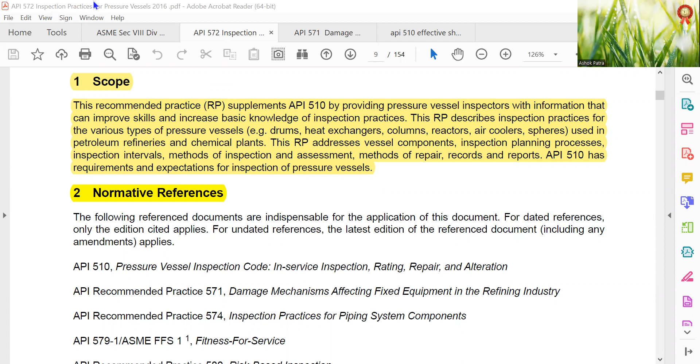API 572, inspection practices for pressure vessel.

This recommended practice, RP, supplements API 510 by providing pressure vessel inspectors with information that can improve skills and increase basic knowledge of inspection practice.

This RP describes inspection practice for the various types of pressure vessels: drums, heat exchangers, columns, reactors, air coolers, spheres used in petroleum refineries and chemical plants.

The RP addresses vessel components, inspection planning process, inspection intervals, method of inspection, assessment, method of repair, records and reports. API 510 has requirements and expectations for inspection of pressure vessels.

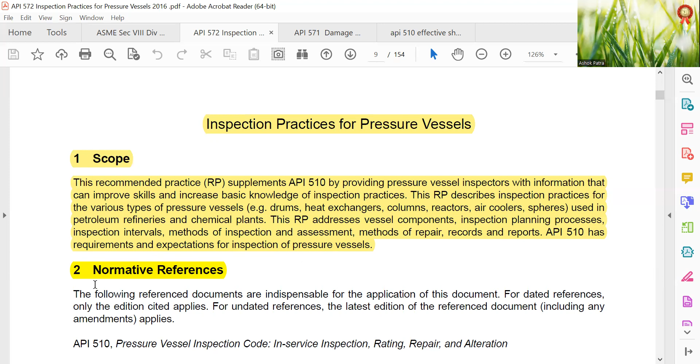Normative references: 510, 571, 574, 579-1 ASME FFS-1 fitness for service, 580 risk-based inspection, API publication 2217A, guideline for safe work in inert confined spaces in the petroleum and petrochemical industry.

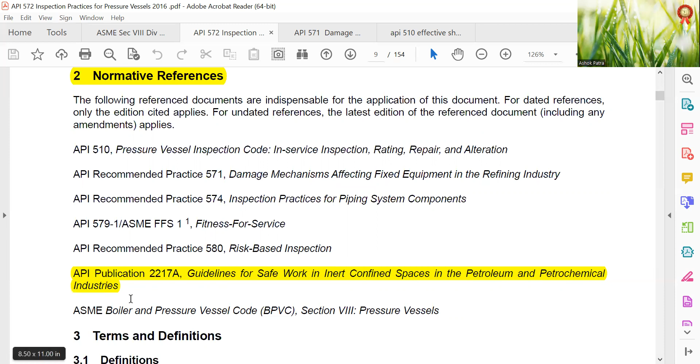Alteration: a physical change in any component that has design implications that affect the pressure containing capability of the pressure vessel beyond the scope described in existing data reports.

The following should not be considered alteration: any comparable or duplicate replacement, the addition of any reinforcement nozzle less than or equal to size of existing reinforced nozzles, and the addition of nozzles not requiring reinforcement.

Cladding: a metal integrally bonded onto another metal under high pressure and temperature, whose properties are better suited to resist damage from the process than the substrate material.

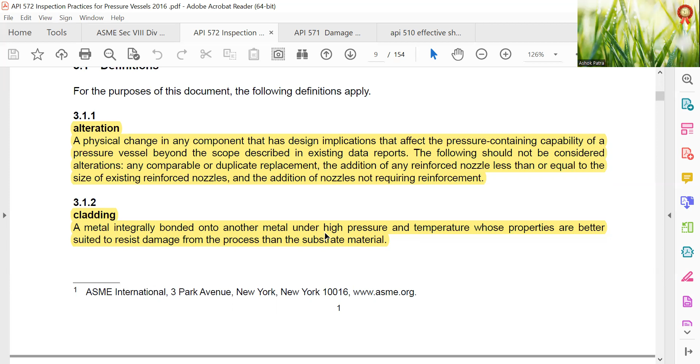CMLs: designated areas of pressure vessels where periodic examinations are conducted in order to directly assess the condition of the vessel. CMLs may contain one or more examination points and utilize multiple inspection techniques that are based on the predicted damage mechanisms to give the highest probability of detection.

CMLs can be a single small area on a pressure vessel, a 2-inch diameter spot, or a plane through a section of a nozzle. The recording points exist in all 4 quadrants of the plane. CMLs now include but are not limited to what were previously called TMLs.

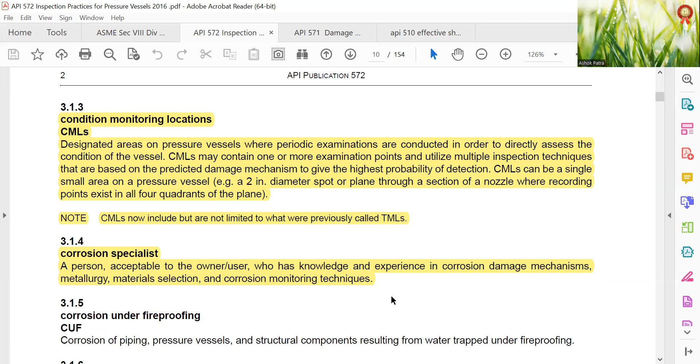Corrosion specialist: a person acceptable to the owner user who has knowledge and experience in corrosion damage mechanisms, metallurgy, material selection, and corrosion monitoring techniques.

CUI: corrosion under insulation. External corrosion of carbon steel piping, pressure vessels, and structural components resulting from water trapped under insulation. External chloride stress corrosion cracking of austenitic and duplex stainless steel under insulation is also classified as CUI damage.

Damage mechanism: any type of damage encountered in the refining and chemical process industry that can result in flaws, defects that can affect the integrity of vessels—corrosion, cracking, erosion, dents, and other mechanical, physical, or chemical impacts. See API RP 571 for a comprehensive list and description of damage mechanisms.

Damage mode: the physical manifestation of damage—wall thinning, pitting, cracking, or rupture.

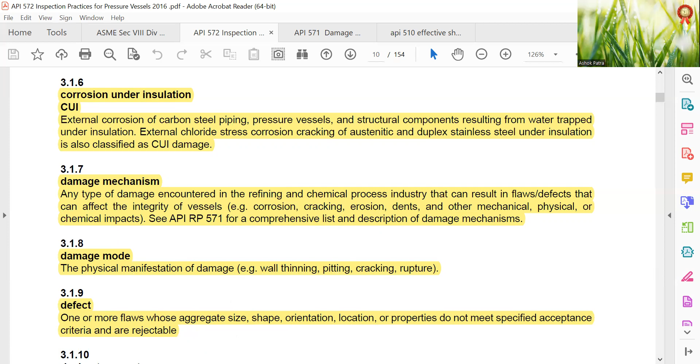Defect: one or more flaws whose aggregate size, shape, orientation, location, or properties do not meet specified acceptance criteria and are rejectable.

Examination point, recording point, measuring point, test point. Test point is a term no longer in use as test refers to mechanical physical test, tensile test, pressure test.

An area within a CML defined as a circle having a diameter not greater than 3 inch, 75 mm. For a pressure vessel, CMLs may contain multiple examination points. For example, a vessel nozzle may have a CML with multiple examination points, an examination point in each of the 4 quadrants of the CML on the nozzle.

External inspection: visual inspection performed from the outside of the pressure vessel to find conditions that could impact the vessel's ability to maintain pressure integrity, or conditions that compromise the integrity of the supporting structures—ladders, platforms, support. The external inspection may be done either while the vessel is operating or while the vessel is out of service, and can be conducted as an on-stream inspection.

Flaw: imperfection or other discontinuity noted during inspections that may or may not exceed the applicable acceptance criteria.

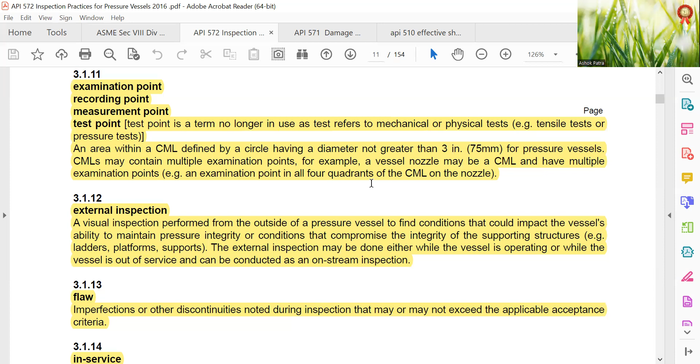In service: designated pressure vessel that has been placed in operation, as opposed to a new construction prior to being placed in service or a retired vessel. A pressure vessel not in operation because of process outage is still considered an in-service pressure vessel. This doesn't include pressure vessels that are still under construction or in transport to site prior to being placed in service, or pressure vessels that have been retired from service.

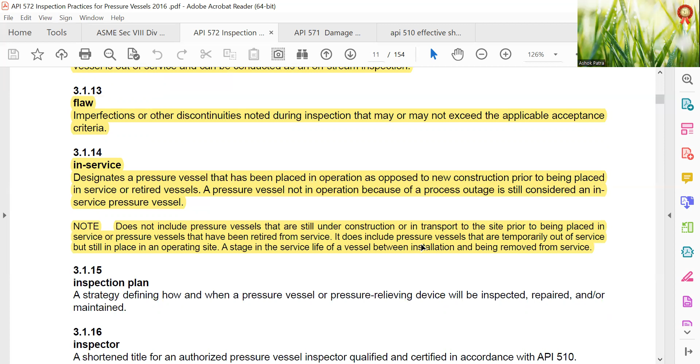This doesn't include pressure vessels that are temporarily out of service but still in place at an operating site. Service life is the life of a vessel between the installation and being removed from service.

Lining: a non-metallic or metallic material installed on the interior of a vessel whose properties are better suited to resist damage from the process than the substrate material.

Maximum allowable working pressure, MAWP: the maximum gauge pressure permitted at the top of the pressure vessel in the operating position for a designated temperature. Pressure is based on calculations using a minimum or average pitted thickness for a critical vessel element, exclusive of thickness designated for corrosion, and adjusted for applicable static head pressure and non-pressure loads—wind, earthquake, etc. The MAWP may refer to either the original design or a rerated MAWP.

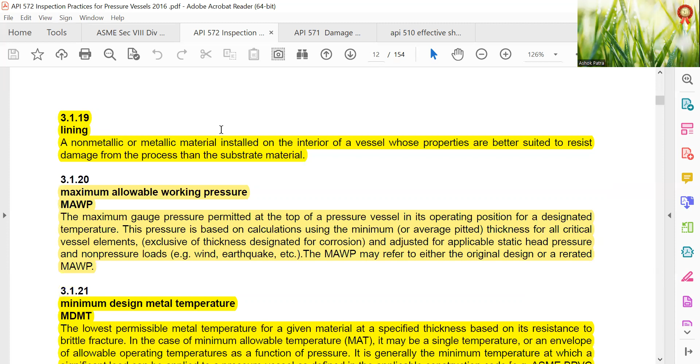The lowest permissible metal temperature for a given material at a specific thickness based on the resistance to brittle fracture. In the case of minimum allowable temperature, MAT, it may be a single temperature or an envelope of allowable operating temperature as a function of pressure. It is generally the minimum temperature at which significant load can be applied to a pressure vessel as defined in the applicable construction code.

ASME BPVC Section 8 Division 1, Paragraph UG-20B, might also be obtained through FFS evaluation on-stream condition, whereby the pressure vessel has not been prepared for internal inspection.

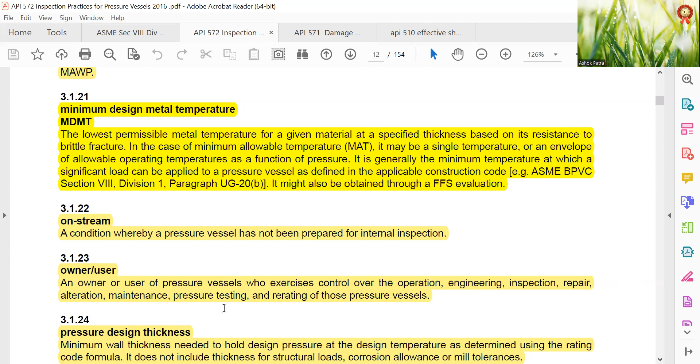Owner user: an owner user is the pressure vessel entity who exercises control over the operation, engineering, inspection, repair, alteration, maintenance, pressure testing, and re-rating of those pressure vessels.

Pressure design thickness: the minimum wall thickness needed to hold design pressure at design temperature, as determined using the rating code formula. This doesn't include thickness for structural loads, corrosion allowance, or mill tolerance.

Pressure vessel: a container designed to withstand internal or external pressure. The pressure may be imposed by an external source, by the application of heat from a direct or indirect source, or by any combination thereof. These definitions include heat exchangers, air coolers, column towers, unfired steam generators, boilers, and other vapor generating vessels that use heat from the operation of a processing system or other indirect heat source.

Pressure vessel engineer: a person acceptable to the owner-user who is knowledgeable and experienced in the engineering discipline associated with evaluating mechanical and material characteristics that affect the integrity and reliability of pressure vessels. The pressure vessel engineer, by consulting with appropriate specialists, should be regarded as a composite of all entities necessary to properly address the technical requirements. Whenever the term engineer is used in this RP, it refers to a pressure vessel engineer.

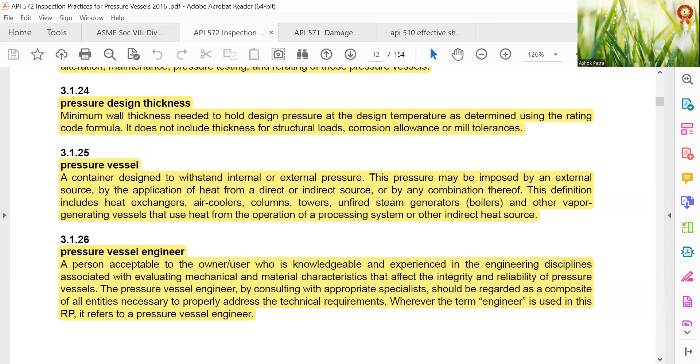Repair: the work necessary to restore a vessel to a condition suitable for safe operation at the design condition. If any of the restorative work results in a change to design temperature, MDMT, or MAWP, the work shall be considered an alteration, and the requirement for re-rating shall be satisfied. Any welding, cutting, or grinding operation on a pressure containing component not specifically considered an alteration is considered a repair.

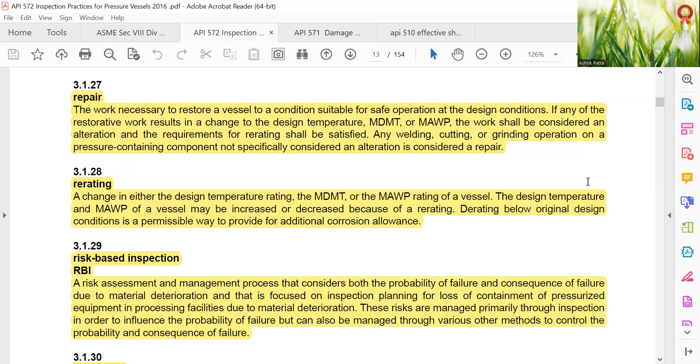Re-rating: a change in either the design temperature rating, MDMT, or MAWP rating of a vessel. The design temperature and MAWP of a vessel may be increased or decreased because of re-rating. De-rating below the original design condition is a permissible way to provide additional corrosion allowance.

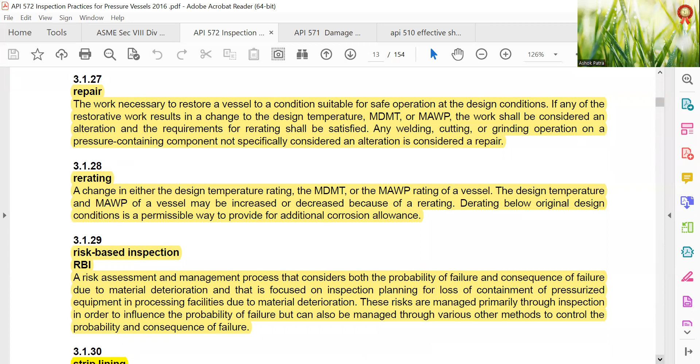Risk-based inspection, RBI: a risk assessment and management process that considers both probability of failure and consequences of failure due to material deterioration, and that is focused on inspection planning for loss of containment of pressurized equipment in processing facilities due to material deterioration. The risks are managed primarily through inspection in order to influence the probability of failure, but can also be managed through various other methods to control the probability and consequences of failure.

Strip lining: strips of metal plates or sheets that are welded to the inside of the vessel wall for the purpose of protecting the vessel construction material from interaction with process fluids. Normally, the strips are of more corrosion resistant or erosion resistant alloy than the vessel wall, and provide additional corrosion and erosion resistance. This is similar to plate lining, except narrower strips are used instead of larger plates.

Temper embrittlement: the reduction of toughness due to metallurgical changes that can occur in some low alloy steels, such as 2.25 chrome 1 moly, as a result of long-term exposure in the temperature range of about 650 to 1100 degrees Fahrenheit, that is 345 to 595 degrees centigrade.

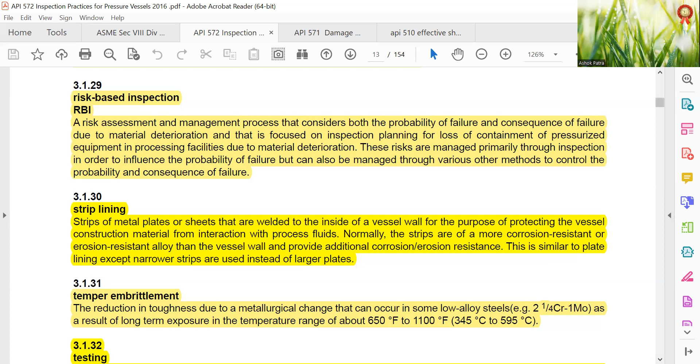Testing: within this document, testing generally refers to either pressure testing, whether performed hydrostatically, pneumatically, or a combination of hydrostatic and pneumatic, or mechanical testing to determine data such as material hardness, strength, and notch toughness. Testing, however, doesn't refer to NDE using techniques such as liquid penetrant examination, magnetic particle examination, ultrasonic examination, radiographic examination, etc.

So this testing doesn't refer to this. This is NDE, non-destructive examination, as per API.

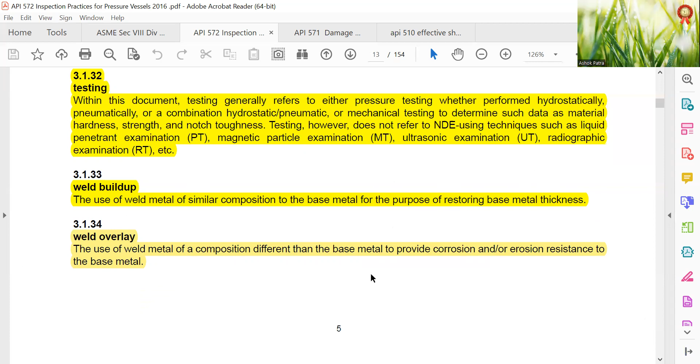Weld buildup: the use of weld metal of similar composition to the base metal for the purpose of restoring base metal thickness. Weld overlay: the use of weld metal of a composition different than the base metal to provide corrosion and erosion resistance to the base metal.

Acronyms and abbreviations: AUT, automated ultrasonic examination. CUF, corrosion under fireproofing. ET, eddy current examination. FRI, fractionation research incorporated. FRP, fiber reinforced plastic. H2S, hydrogen sulfide. MT, magnetic particle examination. MOC, management of change. NDE, non-destructive examination. PASCC, polythionic acid stress corrosion cracking. PRD, pressure relief device. PT, liquid penetrant examination. RT, radiographic examination. UT, ultrasonic examination. WFMPT, wet fluorescent magnetic particle examination.

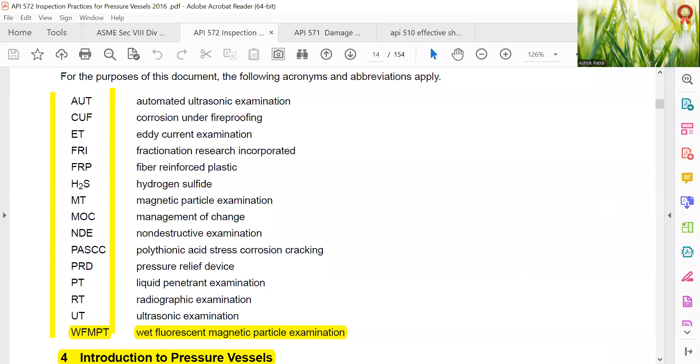Introduction to pressure vessels. General: a pressure vessel is a container designed to withstand internal and external pressure. The pressure vessel may be constructed in accordance with ASME BPVC Section 8, other recognized pressure vessel codes, or as approved by jurisdiction. These codes typically limit design basis to an external or internal design pressure no less than 15 pounds per square inch, 15 psi or 103 kPa. However, this RP also includes vessels that operate at lower pressures.

External pressure on a vessel can be caused by internal vacuum or fluid pressure between a jacket and the vessel wall. Vessels subjected to external pressure are usually inspected in the same manner as those subjected to internal pressure.

Pressure vessels are designed in various shapes. They may be cylindrical, flat, conical, toriconical, torispherical, semi-ellipsoidal, hemispherical heads, spherical, spheroidal, boxes with flat rectangular or square plate heads, such as those used for headers of air-cooled exchangers, or lobed. They may also be of modular construction.

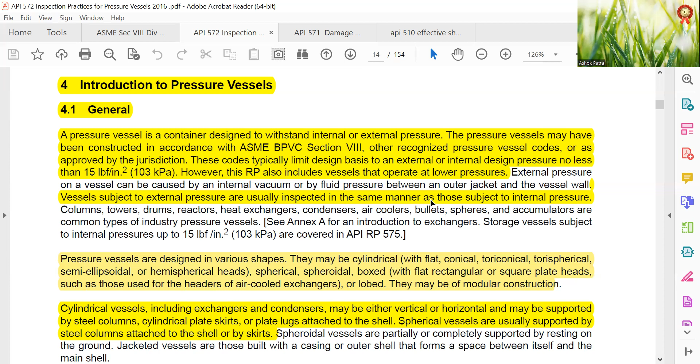Cylindrical vessels, including exchangers and condensers, may be either vertical or horizontal and may be supported by steel columns, cylindrical plate skirts, or plate lugs attached to the shell. Spherical vessels are usually supported by steel columns attached to the shell or by skirt.

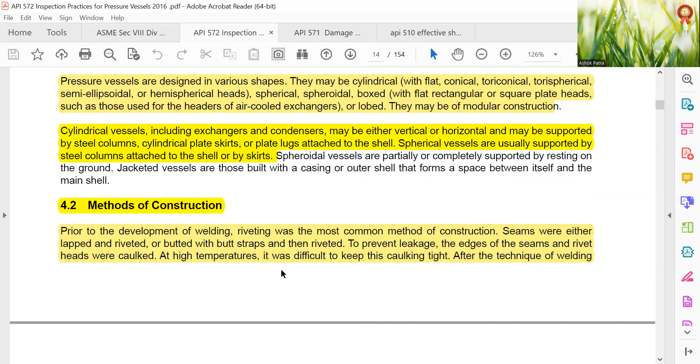Methods of construction: prior to the development of welding, riveting was the most common method of construction. Seams were either lapped and riveted, or butted with butt straps and then riveted. To prevent leakage, the edges of the seams and rivets were caulked. At high temperature, it was difficult to keep the caulking tight.

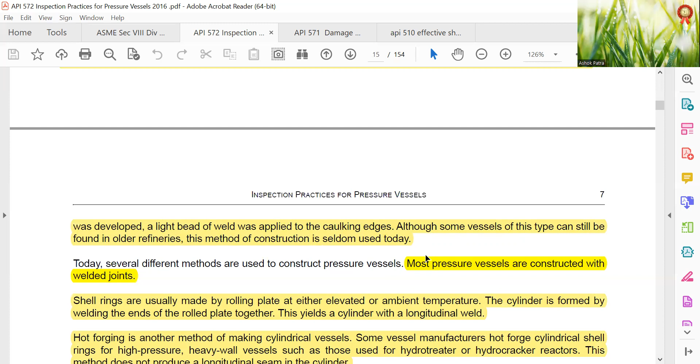After the technique of welding was developed, a light bead of weld was applied to the caulking edges. Although some vessels of this type can still be found in older refineries, this method of construction is seldom used today. Today, most pressure vessels are constructed with welded joints.

Shell rings are usually made by rolling plate at either elevated or ambient temperature. The cylinder is formed by welding the ends of the rolled plate together. This yields a cylinder with a longitudinal weld.

Hot forging is another method of making cylindrical vessels. Some manufacturers use hot forged cylindrical shell rings for high pressure, heavy wall vessels, such as those used for hydrotreater or hydrocracker reactors. This method doesn't produce a longitudinal seam in the cylinder.

In a multi-layer method, the cylindrical section is made up of a number of thin concentric cylinders fabricated together, one over the other, until the desired thickness is obtained. Multi-layer construction is sometimes used for heavy wall reactors and vessels subjected to high pressure.

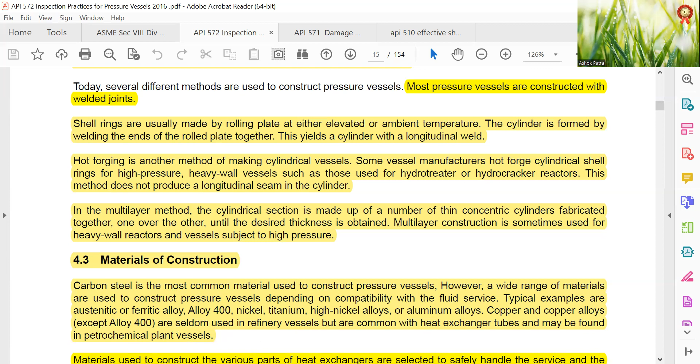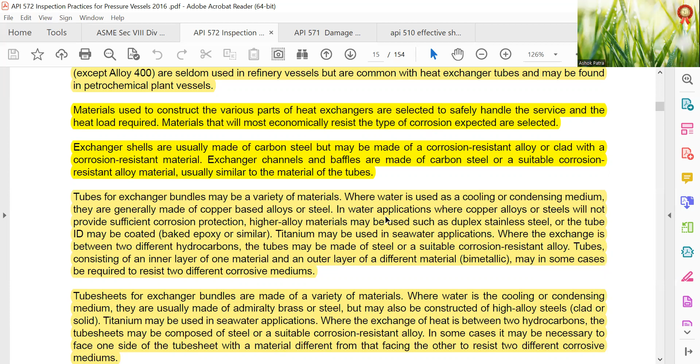Materials used to construct the various parts of heat exchangers are selected to safely handle the service and the heat load required. Materials that will most economically resist the type of corrosion expected are selected. Exchanger shells are usually made of carbon steel but may be made of corrosion resistant alloy or clad with a corrosion resistant material. Exchanger channels or baffles are made of carbon steel or a suitable corrosion resistant alloy material, usually similar to the material of the tubes.

Tubes for exchanger bundles may be a variety of materials where water is used as a cooling or condensing medium. They are generally made of copper-based alloys or steel. In water applications where copper alloys or steels will not provide sufficient corrosion protection, higher alloy materials may be used, such as duplex stainless steel, or the tube ID may be coated.

Baked epoxy or similar coatings, or titanium, may be used for seawater applications, where the exchange is between two different hydrocarbons. The tubes may be made of steel or a suitable corrosion resistant alloy. Tubes consisting of an inner layer of one material and an outer layer of a different material, bimetallic, may in some cases be required to resist two different corrosive mediums.

Tubesheets for exchanger bundles are made of a variety of materials where water is the cooling or condensing medium. They are usually made up of Admiralty brass or steel, but may be constructed of high alloy steels, clad or solid. Titanium may be used in seawater applications where the exchange of heat is between two hydrocarbons.

The tube sheet may be composed of steel or a suitable corrosion resistant alloy. In some cases, it may be necessary to face one side of the tube sheet with a material different from the facing on the other side, to resist different corrosive mediums.

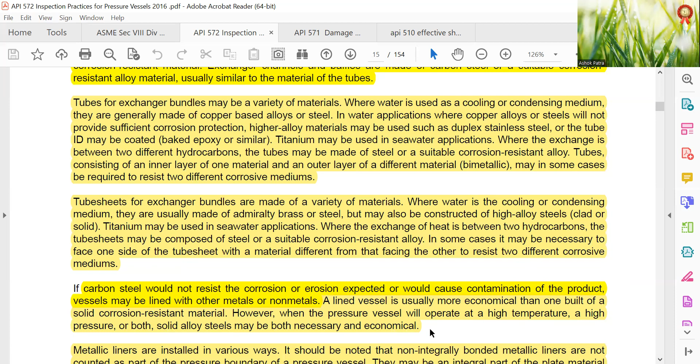Metallic liners are installed in various ways. It should be noted that non-integrally bonded metallic liners are not counted as part of the pressure boundary of a pressure vessel. They may be an integral part of the plate material, rolled or explosion bonded before fabrication of the vessel. They may instead be a separate sheet of metal fastened to the vessel by welding.

Corrosion resistant metal can also be applied to the vessel surface by various weld overlay processes. Metallic liners may be made of ferritic alloy, alloy 400, nickel, lead, and any other metal resistant to the corrosive agent. Figures 1 through 4 show various methods of applying metal lining. Figures 5 and 6 show hex mesh installation to support the refractory lining and the reinforced refractory lining.

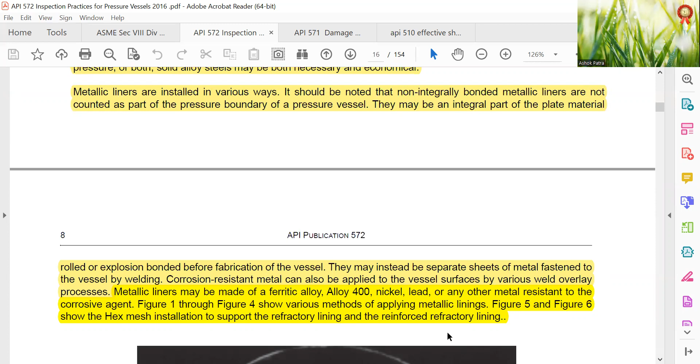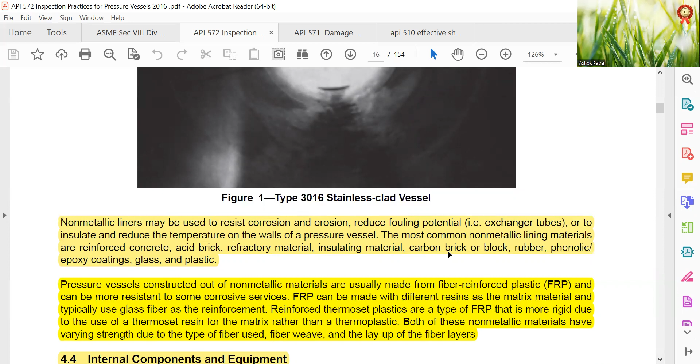Type 3016 stainless steel clad vessel. Non-metallic liners may be used to resist corrosion and erosion, reduce fouling potential, insulate or reduce the temperature on the walls of pressure vessel exchanger tubes. The most common non-metallic lining materials are reinforced concrete, acid brick, refractory material, insulating material, carbon brick, block rubber, phenolic epoxy coating, glass and plastic.

Pressure vessels constructed out of non-metallic materials are usually made from fiber reinforced plastic and can be more resistant to some corrosive service. FRP can be made with different resins as the matrix material, typically using glass fiber as the reinforcement. Reinforced thermoset plastic is a type of FRP that is more rigid due to the use of thermoset resin for the matrix rather than a thermoplastic.

Both of these non-metallic materials have varying strength due to the type of fiber used, fiber weave, and the layup of the fiber layer.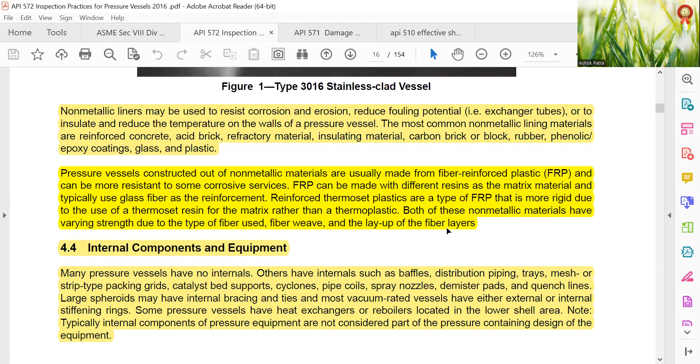Internal components and equipment. Many pressure vessels have no internals. Others have internals such as buffers, baffles, distribution piping, trays, mesh or strip type packing grids, catalyst bed supports, cyclones, pipe coils, spray nozzles, demister pads, and quench lines.

Large spheroids may have internal bracing and ties, and most vacuum-rated vessels have either external or internal stiffening rings. Some pressure vessels have heat exchangers or reboilers located in the lower shell area. Typically, internal components of pressure equipment are not considered part of the pressure containing design of the equipment.

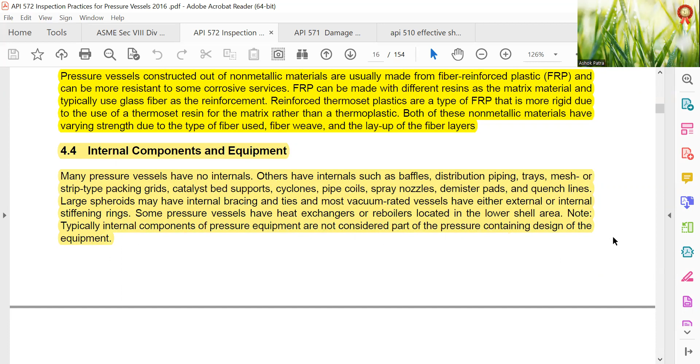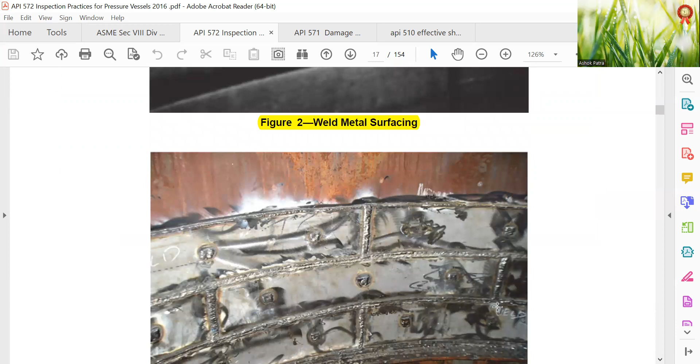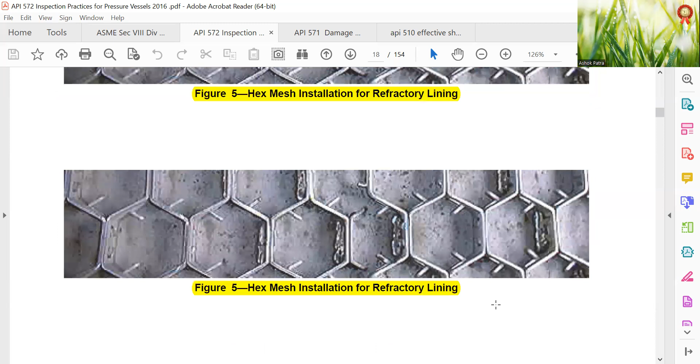Weld metal surfacing. Strip line vessel. Hex mesh installation for refractory lining. Reinforced refractory.

Shell and tube heat exchangers have internal tube bundles with baffles or support plates which vary with the service and heat load the exchanger is designed to handle.

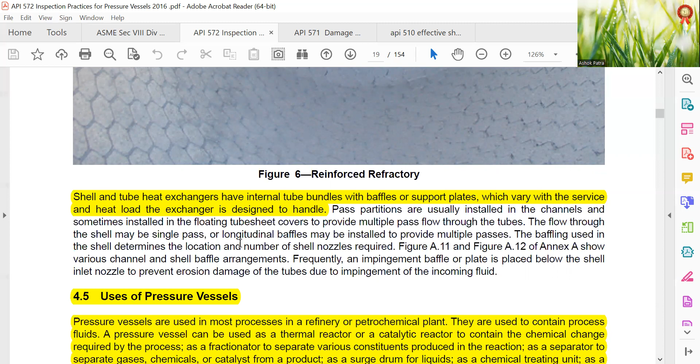Uses of pressure vessels. Pressure vessels are used in most processes in a refinery or petrochemical plant. They are used to contain process fluids.

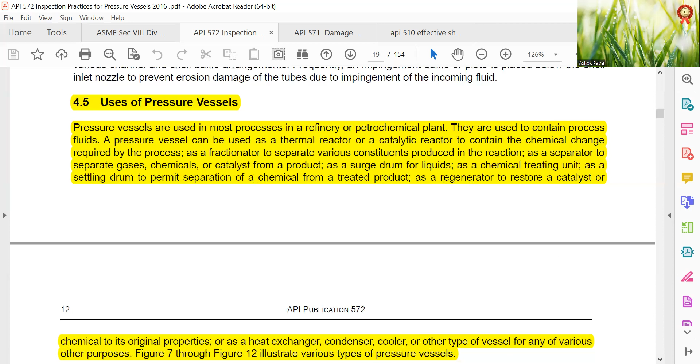A pressure vessel can be used as a thermal reactor or a catalytic reactor to contain the chemical change required by the process, as a fractionator to separate various constituents produced in the reaction, as a separator to separate gases, chemicals, or catalyst from a product, as a surge drum for liquids, as a chemical treating unit, as a settling drum to permit separation of chemical from treated product, as a regenerator to restore catalyst or chemical to its original properties, or as a heat exchanger, condenser, cooler, or other type of vessel for any of the various other purposes.

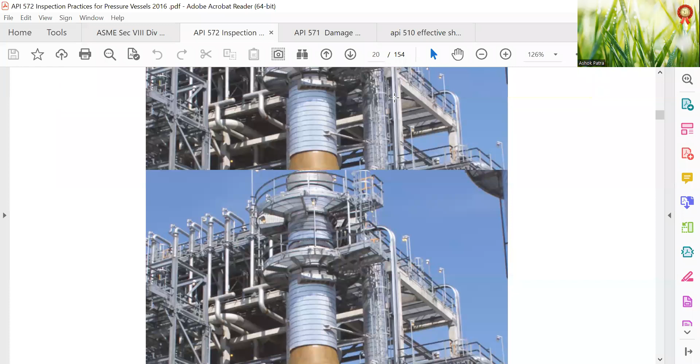Figure 7 through Figure 12 illustrate various types of pressure vessels. Design and construction standards. Vertical heat exchanger, horizontal vessel. Design and construction standards.

Prior to the early 1930s, most unfired pressure vessels for refineries were built to the design and specification of the user or manufacturer. Later, most pressure vessels in the US were built to conform to either the API-ASME code for unfired pressure vessels for petroleum liquids and gases, or to Section 8 of the ASME BPVC. Publication of the API-ASME code for unfired pressure vessels for petroleum liquids and gases was discontinued as of December 31, 1956, and is no longer used for new vessels.

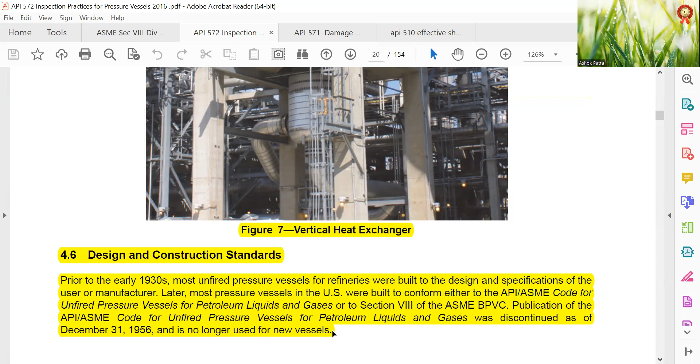Section 8 of the ASME BPVC is divided into three parts: Division 1, Division 2, and Division 3. Division 1 provides requirements applicable to the design, fabrication, inspection, testing, and certification of pressure vessels operating at either internal or external pressure exceeding 15 psig.

Section 8, Division 2 provides alternative or more stringent rules for the design, fabrication, and inspection of vessels than those found in Division 1. Most pressure vessels for US refineries are now built to conform to the latest edition of Section 8, Division 1. Some high pressure vessels are designed and built in accordance with the specifications of Division 2, Section 8. Division 3 provides alternative rules for construction of high pressure vessels with design pressure generally above 10 ksi.

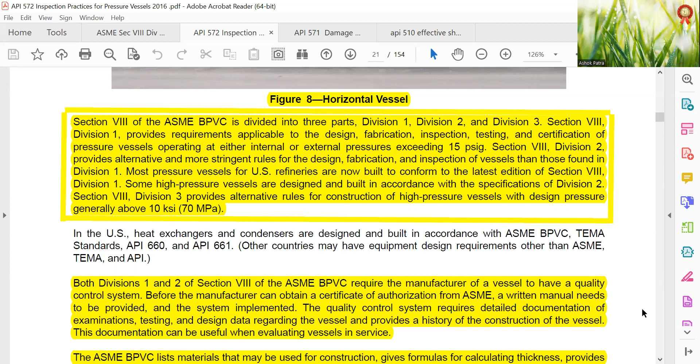Both Division 1 and Division 2 of Section 8 of the ASME require the manufacturer of the vessel to have a quality control system. Before the manufacturer can obtain a certificate of authorization from ASME, a written manual needs to be provided and the system implemented. The quality control system requires detailed documentation of examination, testing, and design data regarding the vessel, and provides a history of the construction of the vessel. That documentation can be useful when evaluating a vessel in service.

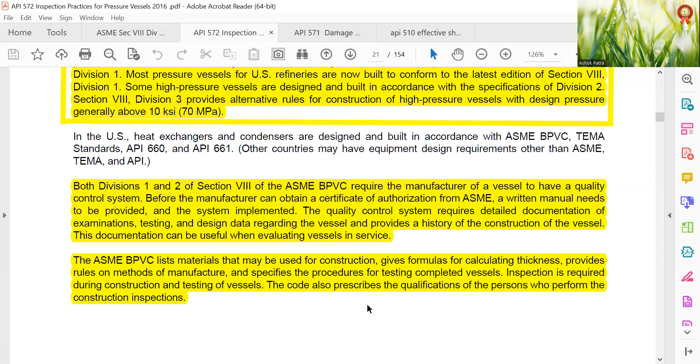The ASME BPVC lists materials that may be used for construction, gives formulas for calculating thickness, provides rules and methods of manufacture, and specifies the procedure for testing completed vessels. Inspection is required during construction and testing of the vessel. The code also prescribes the qualification of the person who performs the construction inspection. Spheres, Horton spheroids, noded.

After a qualified construction inspector certifies that a vessel has been built and tested as required by the ASME BPVC, the manufacturer is empowered to stamp the vessel with the appropriate symbol of the ASME BPVC.

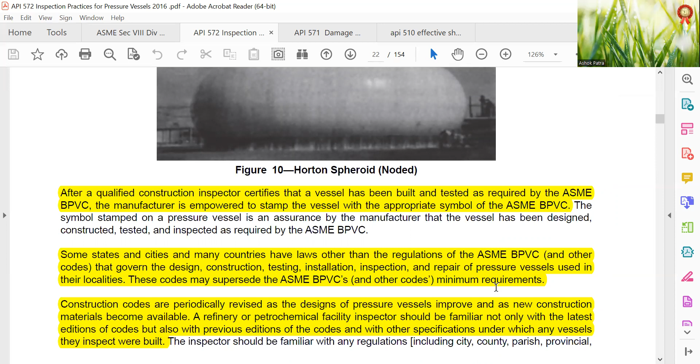Some states, cities, and many countries have laws other than the requirements of the ASME BPVC and other codes that govern the design, construction, testing, installation, inspection, and repair of pressure vessels used in their localities. These codes may supersede the ASME BPVC's and other codes' minimum requirements. Construction codes are periodically revised as the design of pressure vessels improves.

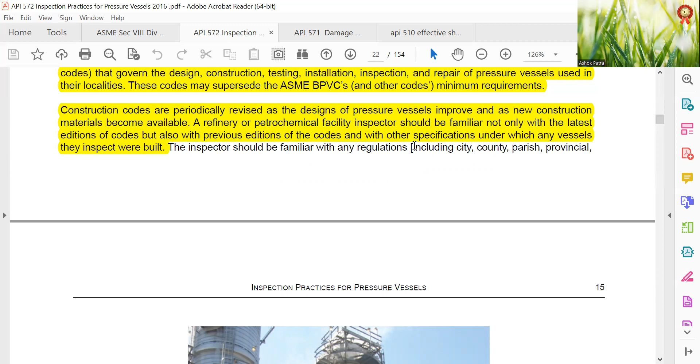As pressure vessels improve and as new construction materials become available, a refinery and petrochemical facility inspector should be familiar not only with the latest edition of build codes, but also with previous editions of the codes and with other specifications under which the vessels they inspect were built. Inspectors should be familiar with any regulations including city, county, parish, provincial, or regional requirements for inspection.